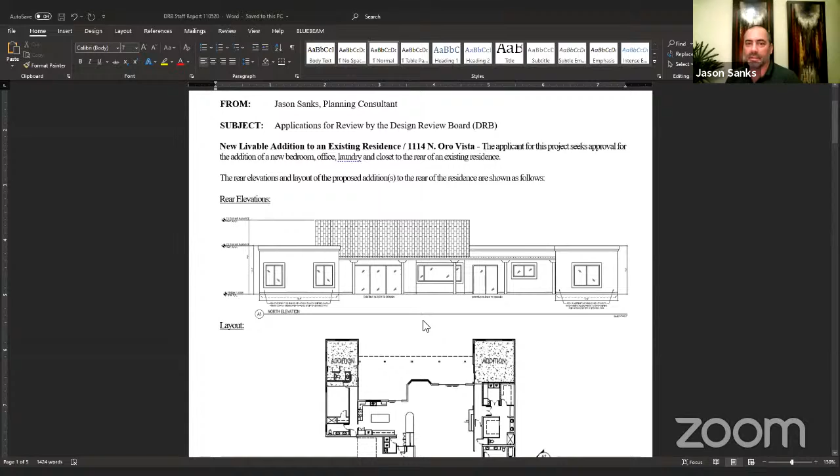Here we go. All right, so for the 1114 North Oro Vista, the applicant seeks approval for the addition of a new bedroom, office, and laundry and closet to the rear of their existing residence. I've added in the rear elevation for quick reference on the staff report, as well as a portion of the overall building's floor plan. I couldn't quite fit the whole site plan on there without taking up the whole page, but clearly you can see the addition portions are in the rear of the residence, not facing a public street. And then in the elevation above, you can see they've maintained the roof line, window fenestration kind of treatments around the windows, and scale as the rest of the residence.

The application does note in its text component that this is a remodel, but to further clarify, it appears in the floor plan that it's really just a remodel for the interior, not an exterior remodel. There's a separate note on the elevations that says the stucco finish and paint color shall match that of the existing residence. That said, staff finds that the addition adds value to the residence and the overall neighborhood, and we're recommending approval subject to the standard condition that all colors, building materials, and finishes shall match those of the existing residence.

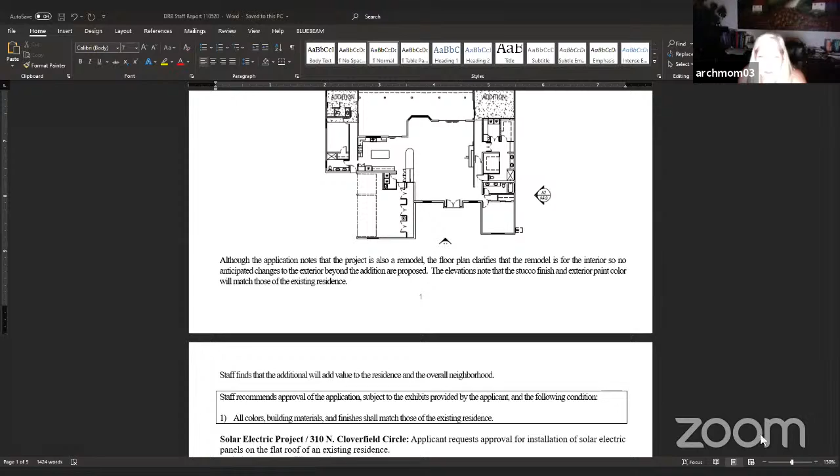Okay, is the applicant present? Yes. Would you like, is there any information you want to share with us? Not really, we are really just seeking a standard addition. There's really nothing atypical about the proposal. And like I said, we'll go in for a building permit once you guys approve. So no, I don't really have anything further to add.

Okay, thank you. Do any of the board members have any questions for staff or the applicant? None? Would someone like to propose a motion?

Sure. Oh, hi Brian. I move that we approve the application at... sorry, I'm trying to go back and forth... 1114 North Oro Vista, and that we approve it based off of staff's recommendations and their requirements added at the end, that everything matches the existing.

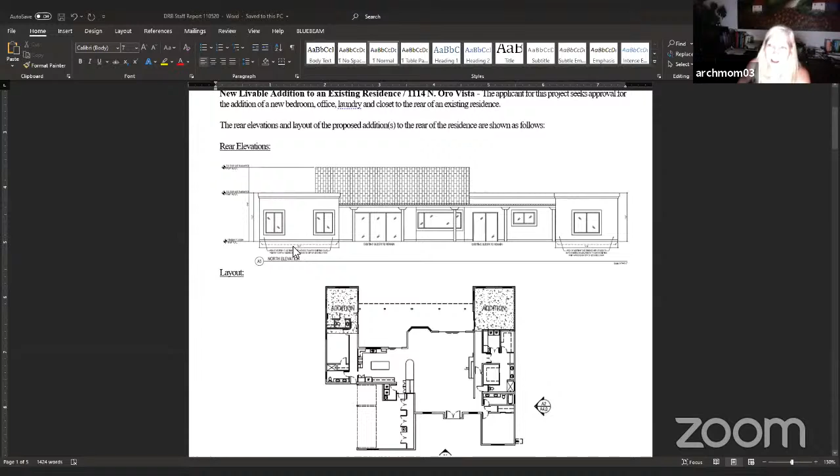Okay, I'll second. And I have a second. Rachel? Yeah, I'll second. Okay, any further discussion? All in favor, say aye or wave your hand for Pam. Aye. Aye. Aye. We lost Dave somewhere. Aye. Okay, are there any nays? No. Okay, then it passes.

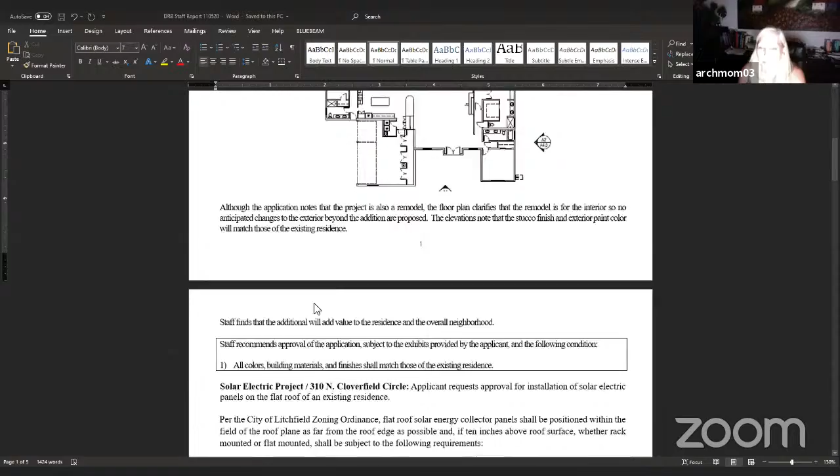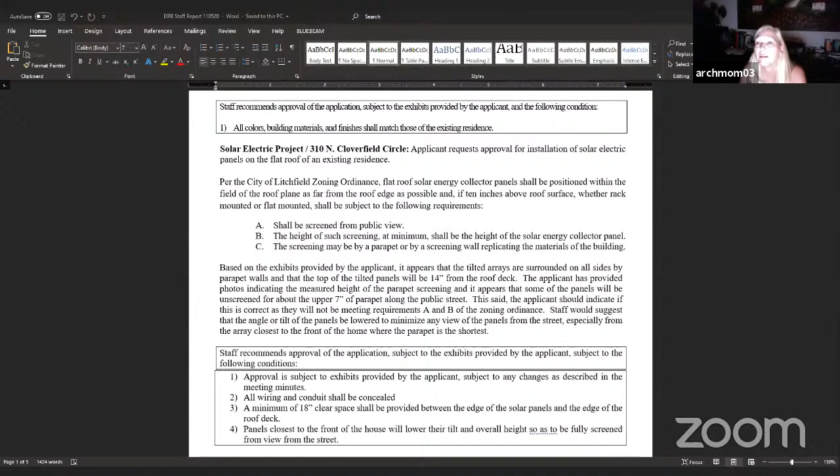Thank you. Okay, great, thank you so much. Thank you. Okay, now I got to get back to my... okay, I'm gonna move that over. Options. Oh, that didn't work. I can't get back to my screen so I can get the agenda. Share screen. Huh. No. Sorry, oh there we go. Does that help if I stop sharing? Yes, thank you, sorry, I was hogging the screen. I'm sorry. Yeah, that's all right. It's good when you're showing your screen, but then I can't find my screen.

All right, item B, design plans for roof-mounted solar panel installation proposed for 310 North Cloverfield Circle. Jason, you have a report on that one?

You're muted. Thank you, just one second if you don't mind. I'm actually going to pull up, see if I need to. I found it, okay great. I was looking for the PDF bundle for the applicant submittal documents in case I need to share it. So let me go ahead and roll into the staff report.

All right, so for 310 North Cloverfield Circle, it's a request for a solar electric panel installation on the flat roof of an existing residence.

As a reminder to the board and to the public, per the zoning ordinance of Litchfield Park, 3 requirements must be met for the placement on the roof: A, that the panels shall be screened from public view; B, the height of such screening at a minimum shall be the height of the solar energy collector panel; and C, that the screening may be a parapet or a screening wall replicating the materials of the building.

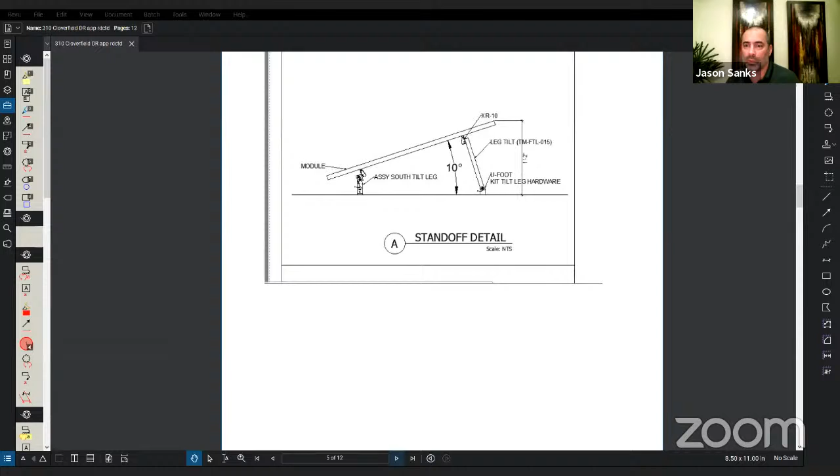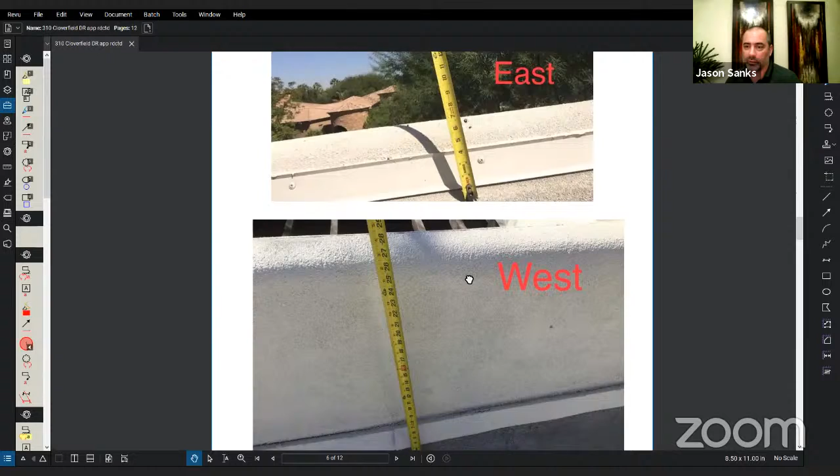So I'm sharing the screen now that shows you the tilt of the panels. You can see that at their highest point, they're about 1 foot 2 inches off the top of the roof. The applicant has provided photos that show in the front of the home you've got about 7 inches of clearance on the parapet. In the rear, or as you get to the sides, it's much greater, presuming that the top of the roof must slant to the back, where the roof would drain maybe to the rear yard.

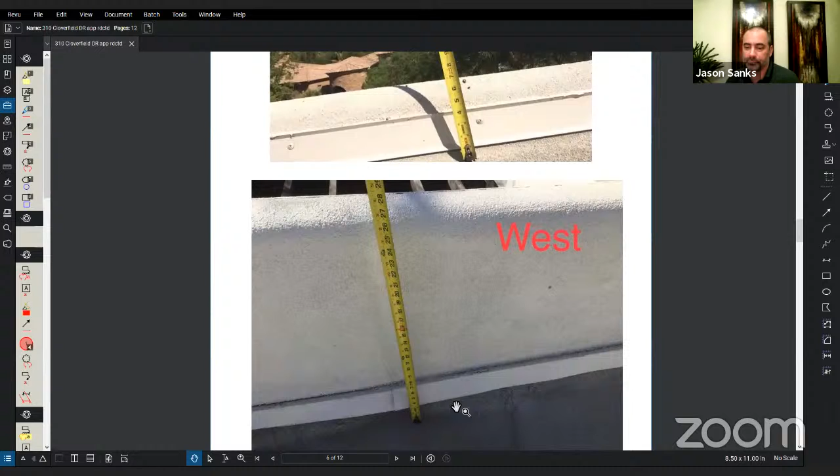So the concern that staff has is that the front of the home's solar electric panel array may be closest to the front of the home where the parapet may be shortest, giving you about 6 to 7 inches of panel visible from the street as they pop up over the top of the parapet in relative close proximity to that wall. Staff would suggest to the applicant to strongly consider reducing the angle or pitch of at least the first array, so that we can lower the heights down and it wouldn't be quite as visible.

In the past, we've looked at sometimes allowing a few inches to pop up because it's presumed the line of sight from the street means you really won't catch it or it won't be so visually obvious that they're exceeding the height. But that said, as presented, they don't meet conditions A and B of the ordinance. So we would suggest that as a mitigating component to get staff approval, they lower the height of those panels in the front row or front array at least.

And is the applicant present? It doesn't appear we have anybody in the meeting room besides Sun Health for the next item, and staff and then board.

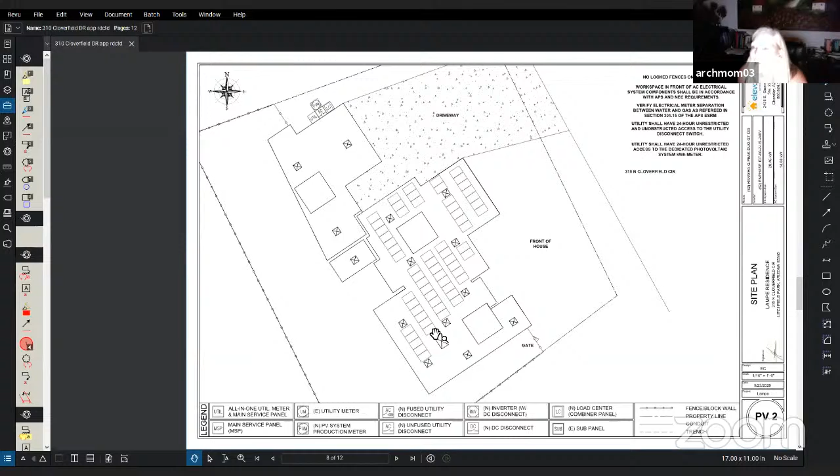Aye. Okay, thanks. All right, we'll move on to item C, site landscaping, lighting, and architectural plans proposed for 15.5 acres of the orchard at Rancho La Loma, a residential senior living development at the northwest corner of Camelback and Litchfield Roads. So Jason, you want to give us your overview on this?

Definitely, Chair. I'll go ahead and share my screen once more to show you the staff report. I've embedded images in this, and if we need to, I can toggle to the actual exhibits provided by the applicant. I know the applicant's here with Sun Health. I see that Paul is in the meeting room, as well as Carolyn Oberholser, his attorney representative.

As you may know, Council's recently adopted the ordinance for the planned area development rezoning case for Sun Health, which has allowed them to proceed forward with their design review board application that includes the site plan, landscaping, grading and drainage, and building elevations for 15.5 acres of the project.

That 15.5 acres is located within the 82-acre conceptual development plan that was also approved by City Council. It is this same 15.5 acres which will need to move forward to the City Council through what's called a final development plan under separate application in the very near future, as ultimately per zoning, council will have the final blessing on the exhibits within that application.

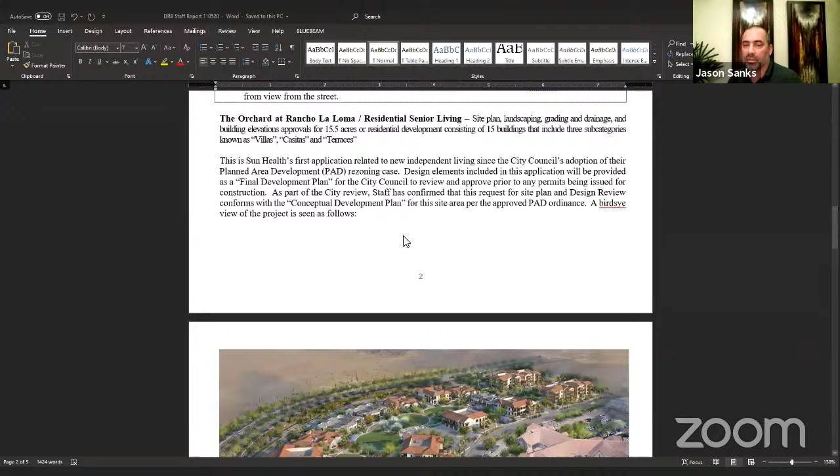Which are likely to include building elevations, landscaping, etc. It was the council's choice to present that additional layer of scrutiny on the project to ensure conformity with not only the zoning ordinance, but the development agreement that went in tandem with the zoning approval.

So you can see down below, I've placed a bird's eye image that gives you a nice wraparound of what the full project entails. There's going to be 3 housing types. They're referred to as casitas, villas, and terraces.

So you're going to have some lower density single level units. You can see one down here where they have their own independent driveways and garages. These are the largest, most independent of living, but they're the most spread out, if you will, of living.

And then the density starts to go up as you get to these larger houses here, and then the higher density units in the back, where there's a cluster of up to 16 units per building. So in the casitas, you'll find about 2,500 to 2,700 square feet for each unit.

So they're relatively large. The terrace units have approximately 5 units with a live above. The garages you can see pop out here, and then there's living space above those garages. You can see the elevations, and I'll show you some of the elevations as we scroll through. In the back, it's more of a stacked living concept.

Again, all of the units, there's 1 parking space provided per unit, which does exceed the ordinance requirement of just 0.7 spaces per unit. That parking requirement tally would be somewhat less than you would find in a standard multifamily project due to this being an age-restricted community.

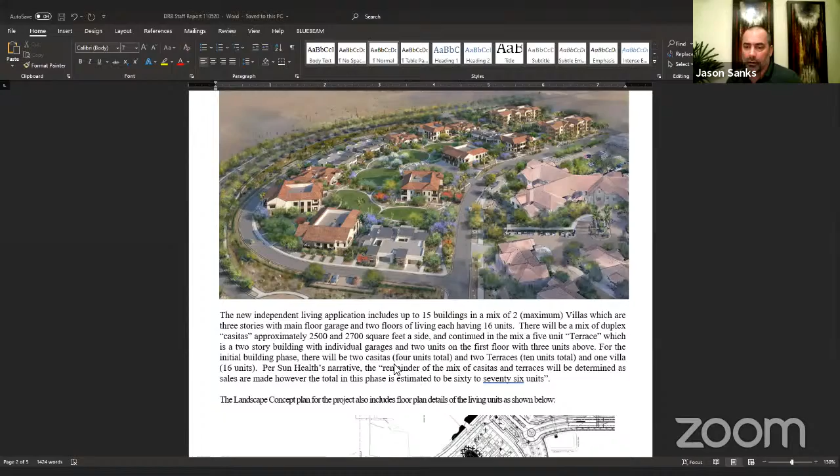And all of these units would be built out to the west of the campus, for the existing Sun Health campus over here, and then extend to the north. These would be the Casita units, which are the lower density to the south, the medium density up here, continuing, some interchangeable, and then the higher density 16 unit each buildings would be up here, built across two phases.

My understanding is they just want to build one of the 16 unit buildings now, and then at a later phase they'll build out the second building. The kind of overriding design vision that they have at SunHealth is the idea that these buildings would be clustered around significant amounts of open space within the project.

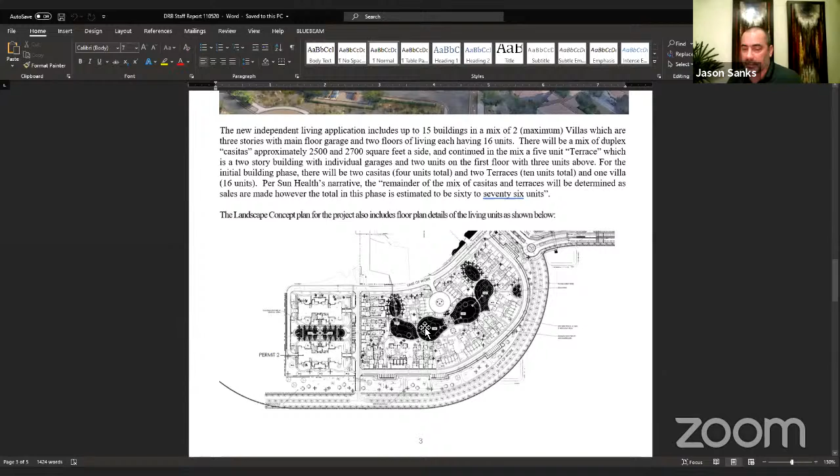As required by their PAD zoning ordinance, they're required to provide a minimum of 15% open space. In the case of these buildings, there's significant open space, approximately 60%, which is quite significant for SunHealth's project. With the parking interspersed here, not a whole lot of surface parking is needed since so much of it's in the garage. The outer streets provide access, and then a series of sidewalks and pathways connect to the park space and between buildings.

The three housing types that I described before are mentioned. One is the casitas. They've got a couple different elevation types. One is the contemporary style. This may remind you a bit of the community center building that they had approved several months ago. That's not yet constructed, but it definitely brings in some of the more contemporary Southwest style. I'm not sure what to call it — the chair probably has a better terminology than I do as an architect, but it's more of that kind of Southwestern modern look.

Whereas if you go to the second elevation type, also available in a kind of duplex casita unit, you'll have a more traditional style — I don't know what you'd call it. It's got stone veneer, exposed rafter tails, concrete tile roof lines, pitched roof lines. Maybe it's a Southwest contemporary. It's kind of a Spanish style still. Yeah, certainly a Spanish style compared to the contemporary one, which is a more cubist design.

The terrace, the fiveplex units are located here. This is where you see the two-story, not one-story, but a two-story stacked unit with garages beneath. These are fiveplexes, meaning there are 5 dwelling units per building, so they are more dense than the casita units, but not quite as dense as the villas, which are the 3-story stacked units that also include garages. This would be more of that condominium-style stacked living, with garages on the first level and then a series of units with balconies on the second and third levels.

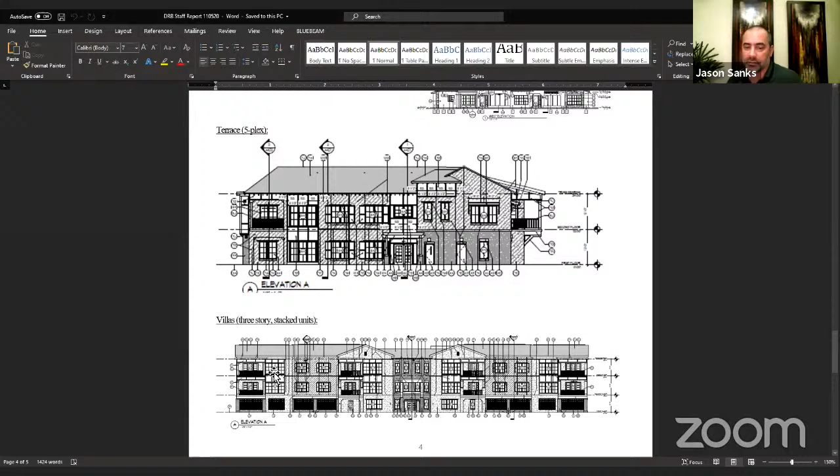Right now, in the very first construction phase, they plan to build one of these, and the ultimate build-out of this phase would include two of them on the north end of the site plan.

A number of items to go through. This is a little less fun than looking at the elevations, but the city engineer has reviewed the request. There are several takeaways being actively followed up on with SunHealth. Their engineer is Hilgart Wilson, who provided some information as late as today.

A few things to confirm: we're expecting to receive approval from Goodyear Fire. As a reminder, if you look at the site plan, access is like one big giant loop cul-de-sac, because it doesn't punch through a collector street access out to Litchfield Road yet — that'll be future phases of development. Right now, all of the access will more or less wiggle down to Camelback Road through Denny Boulevard. It's anticipated they'll get further access in the future, but that would be later phases, and I'm not certain what that timetable might be.

The final development plan will require a traffic impact study. I believe SunHealth, in conjunction with the city engineer, will be negotiating the parameters related to the traffic impact study that will drive their required roadway improvements. That will be handled by the city engineer through the terms of the development agreement and the final development plan that goes to the city council.

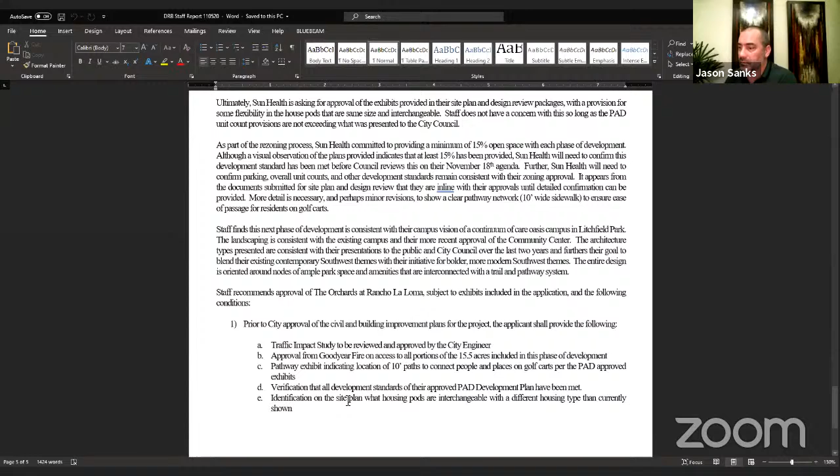Verification that all development standards of their approved PAD development plan have been met, again through the provision of a site data table on their site plan, which I don't have yet, but they have indicated they will provide it, and more specific indication on the site plan of which housing pods could be interchangeable with different housing types than currently shown. This will provide clarity to the building department as they receive final building plans, so they'll know where those housing types are interchangeable.

So those are the only current conditions that I have for the project, and I can also access the project files if you need it. Paul is on the line if he wants to answer questions; he has even more details of the project at his fingertips than I do, since he kind of lives and breathes the development of these plans. I'd be happy to answer questions from the board.

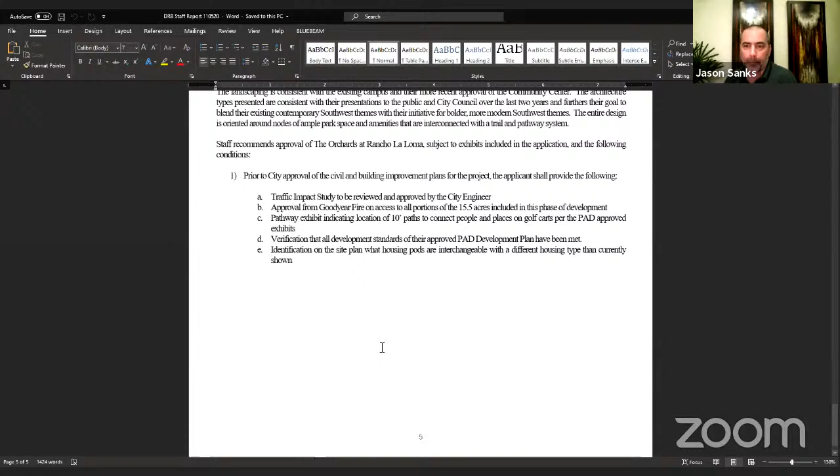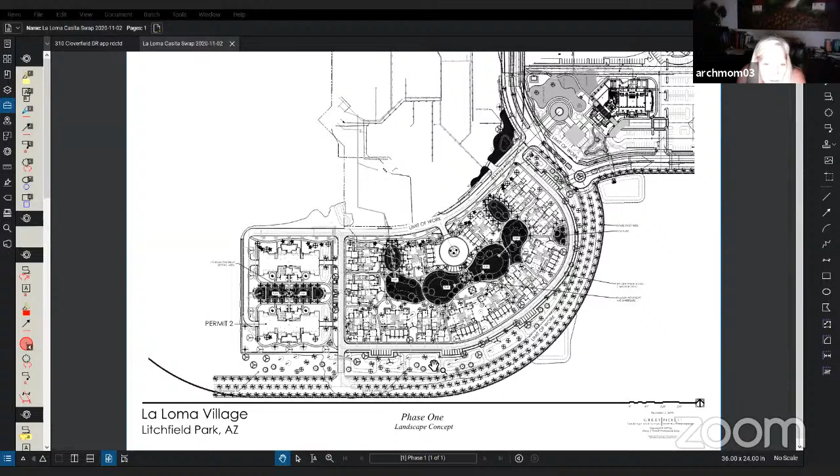We can put up the site plan. Does anybody on the board have specific questions? We can start with the site plan and ask about landscaping and the interchangeable building types. I don't think we brought up lighting, and the drawings are small so it's hard to see. If either the applicant or staff can explain, I'm sure the landscaping is meant to coordinate with the existing development, and also lighting, but it's hard to see. That's something we're supposed to approve along with landscape and architecture.

Yes, Chair and Board, if you'll entertain me for a few minutes, I can address a couple of these items. First, I want to thank Mr. Sanks. I think he did a great job introducing our project, and it is complex. I'm pleased to hear Jason's almost one of our salespeople now. When you need that second job, Jason, we can put you out on site. I think you do a pretty good job. But I wanted to address a few things. Several of the items Mr. Sanks brought up on our list were submitted to the city today.

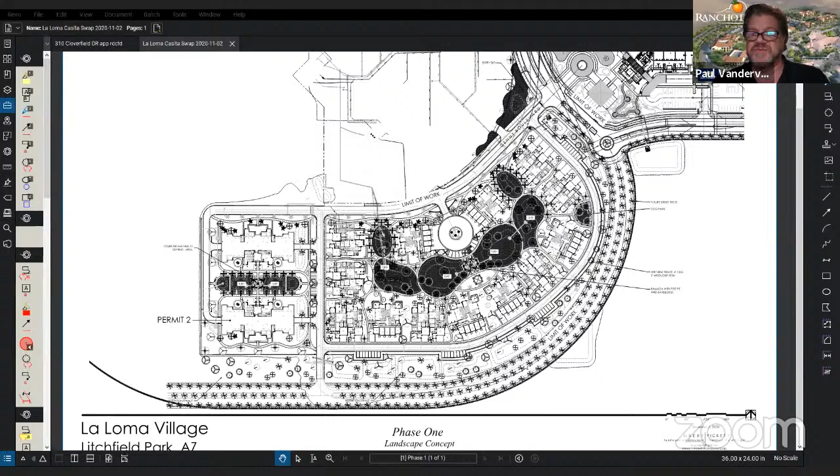We submitted our traffic study. We've submitted a start of a plan for the pathing we're going to do per the 3120 standard required in our zoning ordinance, the pathway ordinance within the city. We're definitely wanting pathing throughout the 300 acres we'll be developing in all phases. Internal to our senior living, there's going to be some discussion about minimizing somewhat, just in the sense that we have concern about the safety of our residents in relation to golf carts. We plan for golf carts—the villa buildings, the yellow ones up top, have a car space and a golf cart space, so we're featuring golf carts and making sure we have transitionary pathways for them. As of today we submitted that we can put the 10-foot wide one on this plan as well, so that will be for the council to review. The traffic study's been addressed, and several other points relating to those issues have been addressed.

On our landscaping, the landscaping at La Loma right now is 15 years old plus, and we've been working over the last year and just put out a new RFP to a new landscape company to try to refresh that. What we're planning here is a little more elaborate than what we did 15 years ago. We plan on having a much more robust type of landscaping that can be enjoyed by our residents, versus something you just walk by that's meeting a code requirement. We call this a pocket neighborhood—you can see the green spaces on the inside, and the parking for these units is really on the outside, so you have that front porch facing all the greens. The two-story product has 2 units on the main floor and 3 units on the top floor with 5 garages in the back, and there are doorways that lead out to these areas.

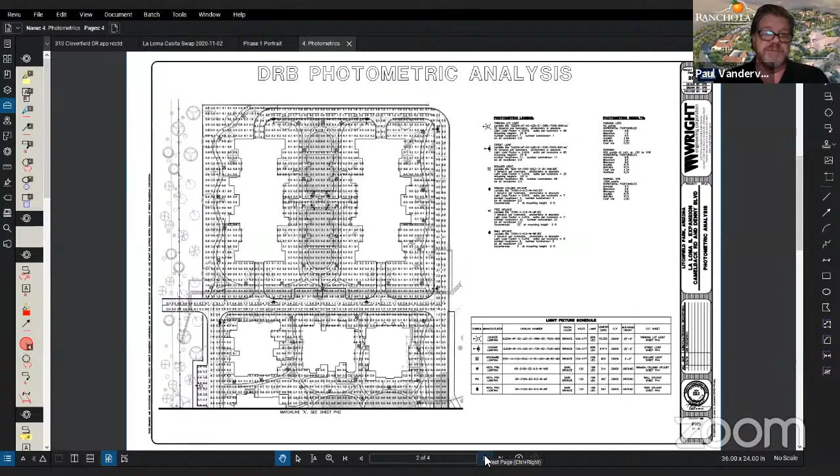On lighting, we've got bollards around the pathways throughout here, and we have street lights. We did get a comment from the city engineer today to add a street light up near one of the villas, and we are already accommodating that request. We're bollarding our walkways so there's good light for our residents, because that's a safety concern for us—they need to be able to transition at different times of the year through light and dark. We got that street light request from the city engineer; I'm not sure exactly where it is on this plan, but he requested one near one of the villas, and we're accommodating that right away.

Any other questions that I can answer? You can always go to the pretty elevations, Jason, if you'd like. Well, we were on lighting and I didn't want to distract with the elevations. I do want to get to the elevations—they're my sales pitch. I'm getting there. I wanted to show that the light bollard details were included in the photometric plan. Thank you.

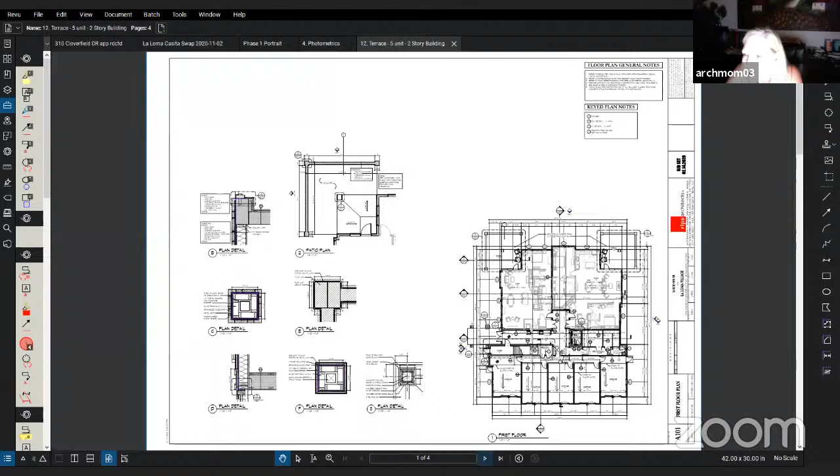Okay, do any of the board members have any questions about the site? Jason was pointing out or asking about which units were interchangeable on the site plan, and whether there's a minimum number of low density units that the city is requesting.

On the site plan, the two villas are very stationary. Those two yellow boxes on the top of the site plan won't move from those locations. The other units down below, shown in light blue and darker blue, can be intermixed because the footprints work the same.

The final plan submitted to the city is really where we think the maximum number of units will be. As submitted, it would total 76 units, which would deduct from the total we're allotted in this area per the zoning case. Depending on how sales go, we may move those around, but I gave the best effort to have a final plan to the city as required.

We would be very sensitive to some view corridors here. If you look at the two villas on top, we wanted to make sure we had low product on the street next to it, so we didn't create too much of a wall effect on that street. We want to make sure lighting can still work through the buildings and other elements like that. We try to avoid doing a few together.

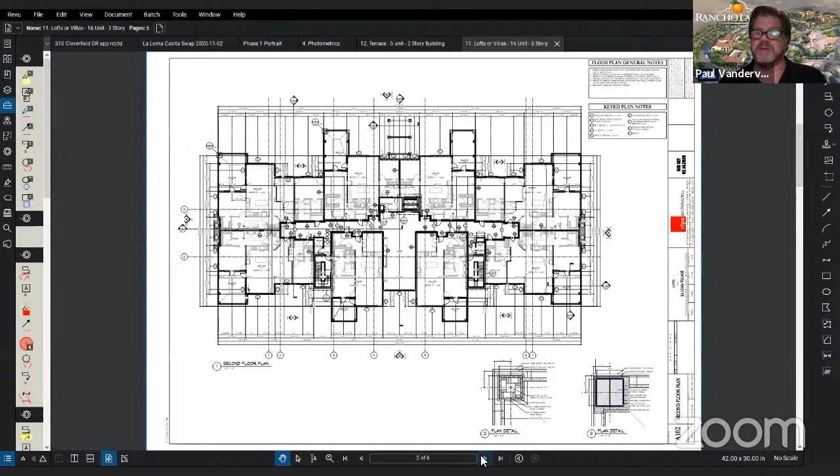It looks like I've got three of the two-story products next to each other, but we did try to avoid that as much as we could, and it's really just a matter of sales on where we do that. So it'll be less than 76 units if we do more casitas than terraces in this phase.

Sorry for the slowness of my program. These files are super large and my laptop is running Zoom at the same time. So it's loading them now so you can kind of see the elevations and the floor plans. Just give it a second if you don't mind to load up.

I think this is actually the next page is what we want. That looks like the roofing on the villa. Yeah, the elevations are coming up now.

I know I have the colored one somewhere. I was really relying on the black line elevations for the presentation, but it would probably be more fun if I had the perspective renderings. I think I have those in my email, but everyone on the board can see what the 3-story units look like here, similar to what you saw in the staff report. I'll see if I have any of the color.

I do have the staff report up, Jason, if you wanted, if I had the ability. I don't know if I have the ability. You may be able to screen share. I don't know if they need to enable that. Did you want me to bring the staff report up? Oh, you're still looking at the staff report. I apologize, let me switch over here. I'm not doing a good job of sharing my screen. You're okay. Oh wait, so you want me to bring the staff report back up?

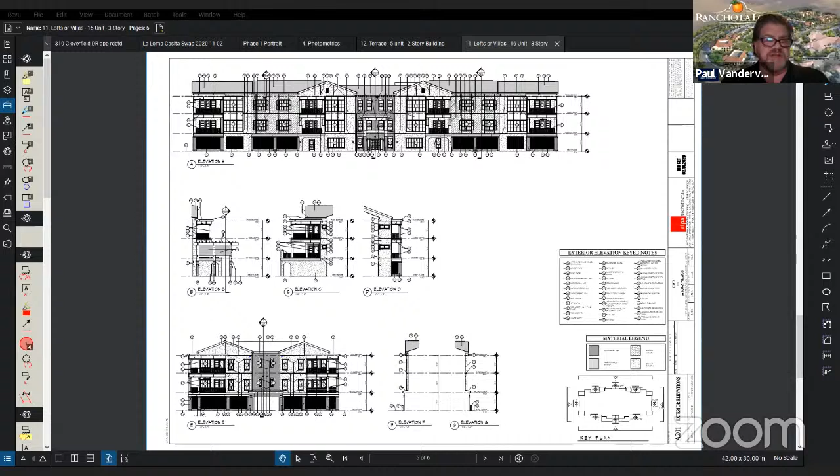Those colored elevations, I think, represent the architecture a little better than the 2D non-rendered document.

While this is up on the screen, what I can tell the board is, and chair... Oh, I found them, I'm sorry, I do have them, give me one second. Good, I don't want to steal all your fun. It's coming up now, there we go. There's a villa, I know. Now you're happy, you can see. Now I'm happy.

I think that just gives a little more life to the 2D elevations. And really, what we're doing with this product, we call it a hybrid product because it's not flat faced like typical apartments where you have a unit that looks straight out on the street.

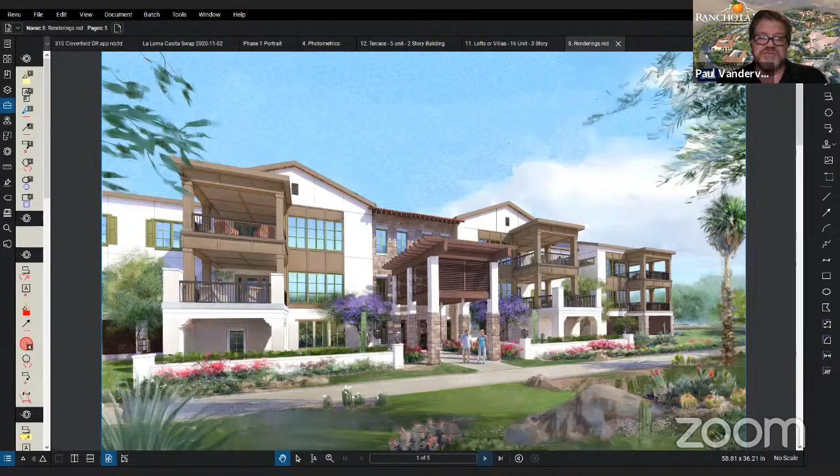Each unit has a balcony system and pop-outs to get light into their living rooms from different angles, and they have a way to live exterior without feeling like they're in an apartment. We call it a hybrid because it's a little more like a condo, and it's a big building, but it feels smaller when you break it up like this. That helps break up the elevation, and we try to incorporate as many elements of rock and textures as we could on the villas.

Why we wanted to go modern on this is because we wanted to pay homage to Litchfield Park's mid-century movement that's very prevalent. We didn't want to just stick to, for lack of a better word, Santa Barbara, Santa Fe. We had a lot of meetings trying to define what the architecture is - I can't tell you if it's Spanish, Santa Barbara, a mixture of 5 different styles into one. But we really thought that if we could pay homage to some of the mid-century, like we did with our community event center that we're building, we'd like to carry some of that feel throughout this community. There aren't probably too many of these, but personally I think it adds some flavor there.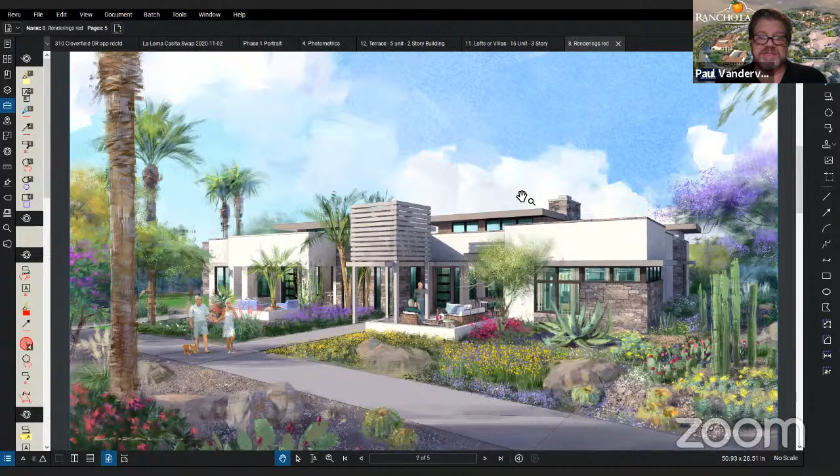The next one will show the more contemporary one. I'll click over to reiterate to the board - you may recall the standard plans that were approved for Sunset Terrace on the east side of Litchfield Road. They did quite well with their mid-century modern inspired elevations.

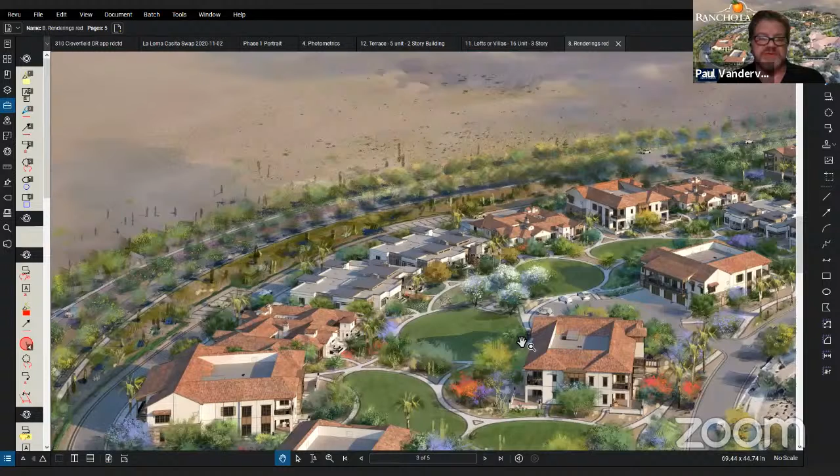These casitas are the biggest units we've ever put in our communities. Part of that is because we know there's a lot of individuals in Litchfield Park that live in 4,000 and 5,000 square foot homes. So for them to downsize to 2,400 feet is actually a pretty significant downsize for them.

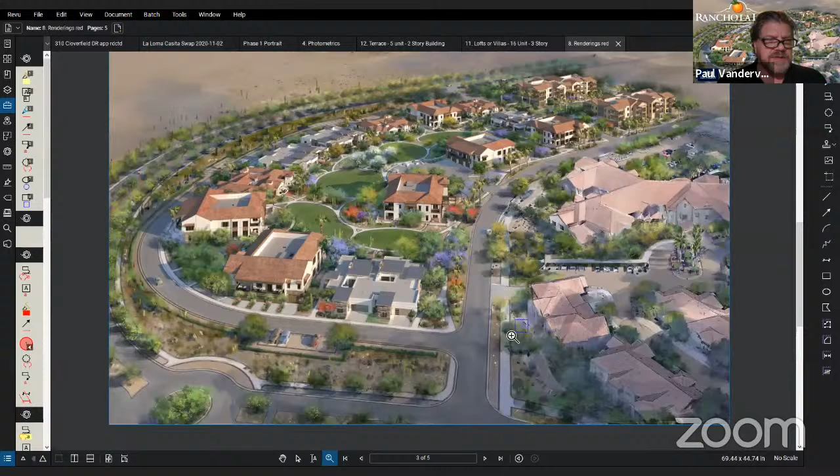So that's - hold on a second. We're having a little issue. I just zoomed into somebody's yard here. There we go, there we go.

So the 2 buildings on the top right, those are the villas, and they're not going to move. The interchangeable would be in that field there, as you see. And this is my marketing picture - it's a little behind, so where I was talking was 3 buildings near the villas. We had a terrace there; we've already replaced that with a casita and moved that terrace over to the other side on the final plan we did for the city. But these footprints for these buildings sit within each other, and that's where that swappability could come in if we need it. Right now at 76, I think we have the mix where we want it.

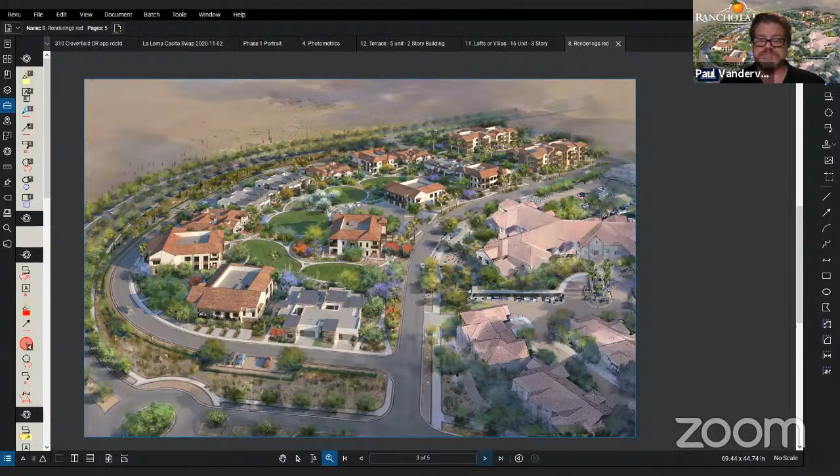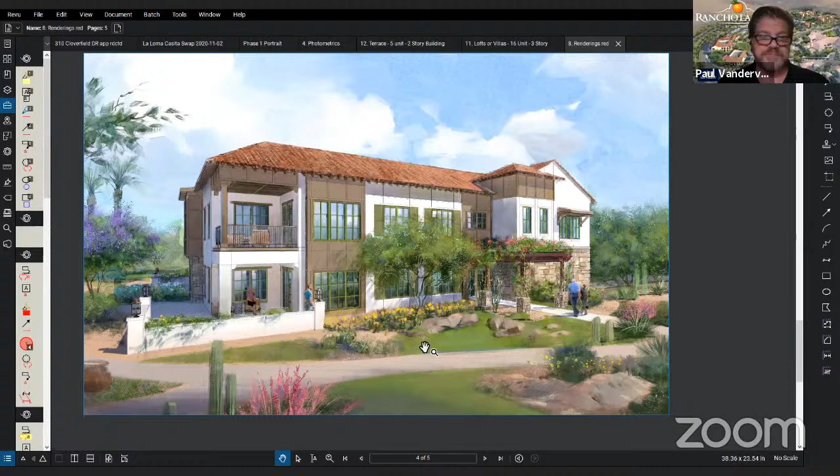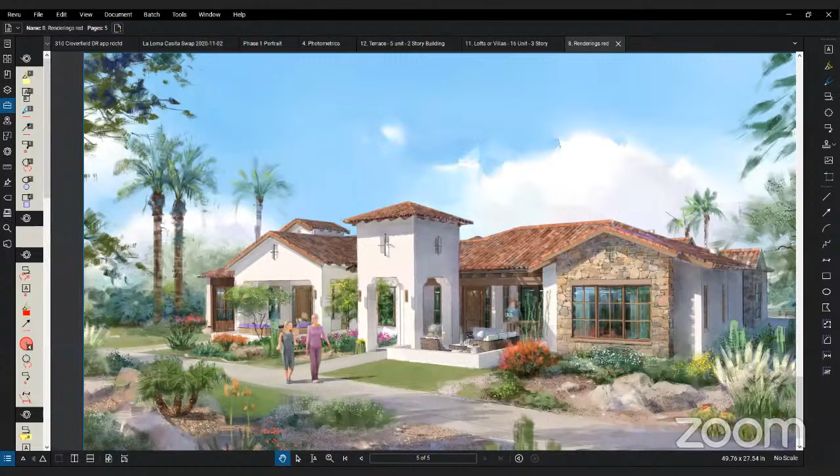Is that the last of the elevations? Yes, that's the last of these ones. These are the last of the colored elevations. I have the black line of everything else, and maybe I'll go back to this as a baseline.

It's the portrait version of the colorized site plan in case there's a question. Or you can look behind my head. I can move it. Thank you. Any board members, if you have any questions, just speak up.

And I think it looks pretty good. Thank you, Chair. I appreciate that coming from an architect.

Chair, you mentioned the concerns with the lighting. In regards to the photometric plans that we have and the lighting details, as the cut sheets on the back, is there something specific you'd like us to work on or consider?

Just the type of lighting which you answered with the bollard lighting for the pathways, and then I don't know if there's any other street lighting, what that looks like, or if it's just the same as what you have in the rest of the development.

Actually, I think we're going to be upgrading that for the whole community. It'll carry a traditional feel, not too different from what we have, but with a little more variety than there was 15 years ago in light poles. We think we can have some elements that tie it in better with the historic nature of the property and still represent current trends. Well, if you can clarify, does that mean you're going to do it?

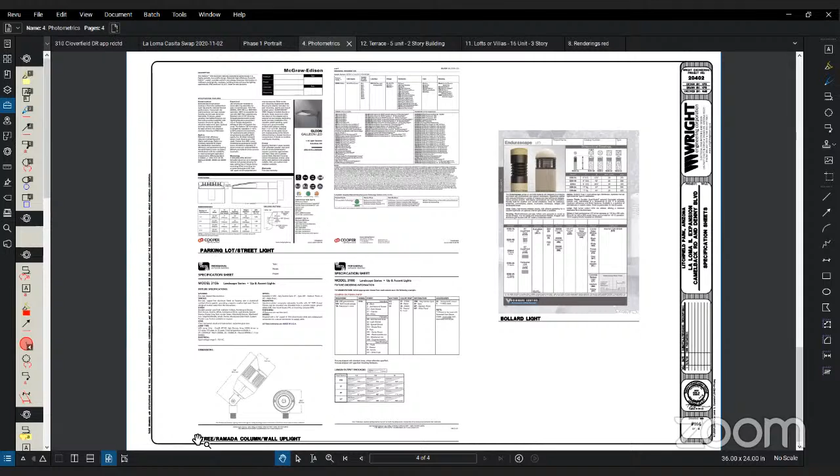It sounds like then with the amount of uplighting on your trees, your ramada columns, and your walls, that you're kind of doing the whole resort light look to it.

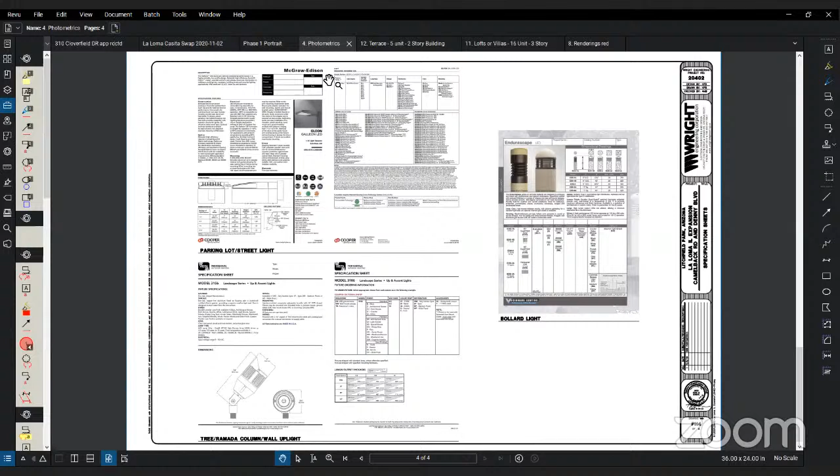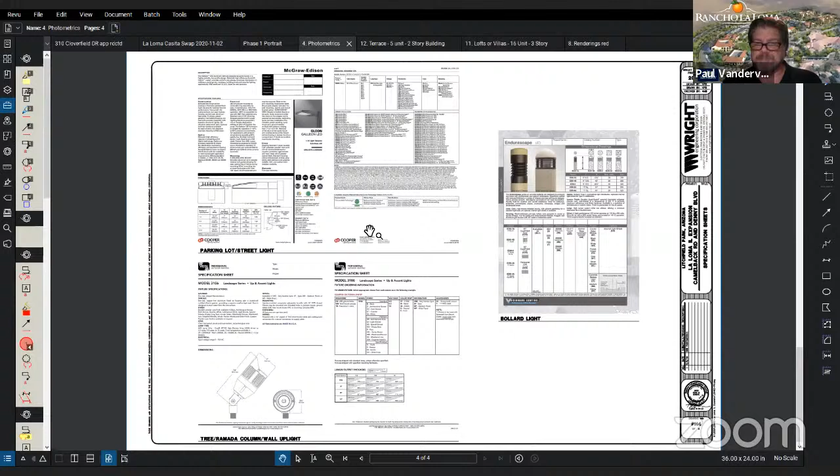Yeah, our clientele dictates our pathway there because we really have to make sure that it's well lit for our residents. We made that mistake once with the existing product on the back side of the building. About 5 years ago we came in with some solar lights to rectify that, and that really helped. But we won't make that mistake in any future development. Lighting is key for our residents' pathways, and we want our residents outside, so it's important to their safety and just feeling safe.

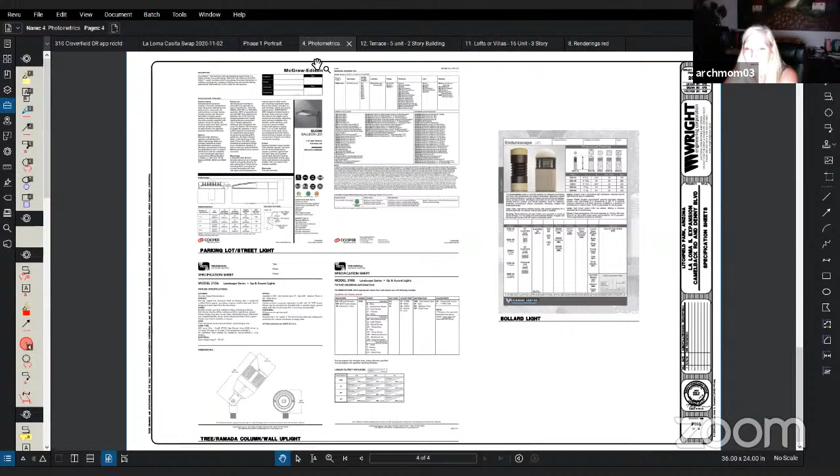Okay, any other questions from the board members? No.

So on the site plan, you're still basically working on the pathway, cart pathway, is that something we just withhold? That's for the city council to approve. I think tonight we're just approving site layout, landscaping, lighting, and architectural design.

Is that what we're being asked to approve this evening? Sure, yes, I believe that's appropriate. We have grading and drainage sheets as well that have been reviewed and commented on by the city engineer, but we do sometimes include those with the DRB submission. It's up to you, we have them I think. I don't know if we have enough, it's such a big project.

I would ask if Paul wants to elaborate where he thinks those 10-foot larger pathways might go. It might be nice for the board to know. You're going to push me on that one, aren't you? Well, I'm already in front of the mayor, so just doing my job.

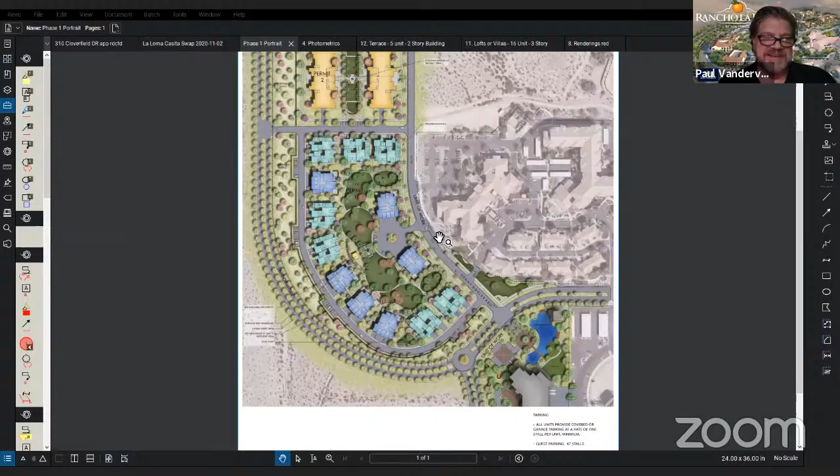Go ahead and push in on the exhibit a little bit. As you can see, almost where that arrow points, up above there on that first casita down from the villa, there's an arrow that points to a pathway. Jason, can you see that on the casita at the top? That's the promenade walk.

So what we've been talking about, and what we submitted back today for discussion, was that we'd widen that promenade walk along the road to be the 10-foot one that transitions from top to bottom. We may also look at the driveway road on the backside of that, so that would give a complete circle. Jason, that's something I think needs a little further discussion, but minimally, I think that one can be the 10-foot wide way from top to bottom, transitioning the property.

That way you can always find a way out of the community onto a bigger path, because down at the bottom where you have the roundabout around our little lake and off to the right, that's a main Denny Boulevard, and it'll continue as a spine road. That will definitely have the 10-foot pathway, because we don't want people going at speed to have to worry about golf carts. In our communities, our speed limit is 12.5 miles an hour on our roads.

If I may, Paul, I wanted to make sure—I recognize the scale of 15.5 acres is not that large, so going from here to here isn't very far. But I was thinking if there are places for those permeations in the plan, so that if I'm living over here with my golf cart, there are ways to logically cross the community without winding all around. You could find some pinch points that might solve some of that circulation, so people aren't restricted to walking, or if they're not even ambulatory, having to get in a vehicle to get around the community.

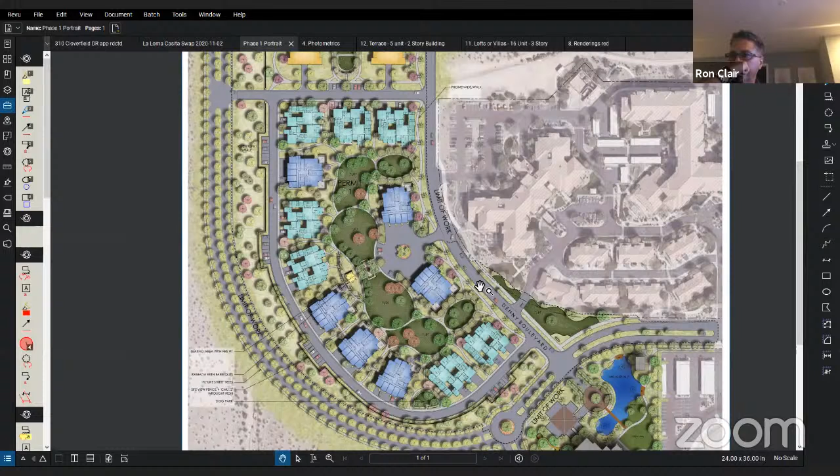I'll make the motion, Chairman. You move to approve. I move to approve, based upon staff recommendations, the Sun Health proposal, including the site layout, landscape, lighting, and architectural elevations. Does anybody else have any? Do you have a second? Thanks, Dave. Any further discussion? Hearing none, all in favor say aye. Aye. Any opposed? None. Okay, thank you.

Thank you. I appreciate your time and your look on our project, and hope to bring more before you soon. Looks good. Thank you.

Let's see, I need my agenda back. Okay, so we're... no, I've got to get to the top. I think we just have minutes then, for the possible approval of minutes for August 6th, 2020.